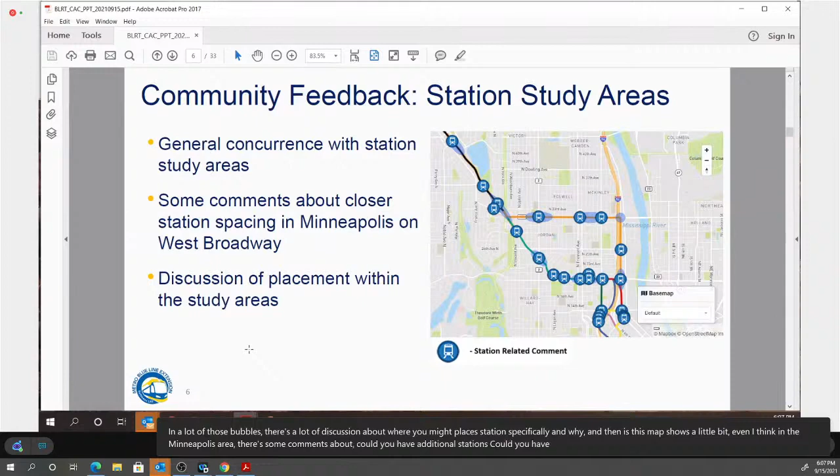So in terms of what we heard about the station study areas, in Brooklyn Park those stations have all been set, so we're focusing more on our southern end for feedback received. I'd say we got fairly general concurrence on where our station study areas should be. In a lot of those bubbles, there's a lot of discussion about where you might place a station specifically and why. And as this map shows, in the Minneapolis area we did get some comments about whether we could have additional stations or closer station spacing, and how that might work. That's kind of an overview of what we heard.

In terms of the visualizations, for the Brooklyn Park community, we re-brought out things people had seen maybe back in 2018. That spurred questions like, how did we make these decisions? How are park and rides sited? Why do you have one at Oak Grove or not at 93rd, and so on.

In Crystal, there are still a lot of questions about the roadway design. We have a bit of an update on Bass Lake Road today. And safe pedestrian connections to the station, and how that all works, has been a continuous topic—one we heard in the past and still hear today. That's a good indication for us that, like with the Bass Lake Road station, pedestrian access, the safety of the pedestrian environment, and how it feels are all important things.

In Robbinsdale, also pedestrian safety. Jason's been at a few meetings where that's been something we talk about quite a bit. Traffic flow, how does it work with emergency vehicles, does it flow with traffic, will it make traffic worse. A lot of conversation about that, because in a lot of ways LRT just flows into that community cohesion conversation. How does LRT become part of what is there versus a dividing piece? And then obviously the connection to Robbinsdale and North Memorial, and that park and ride discussion.

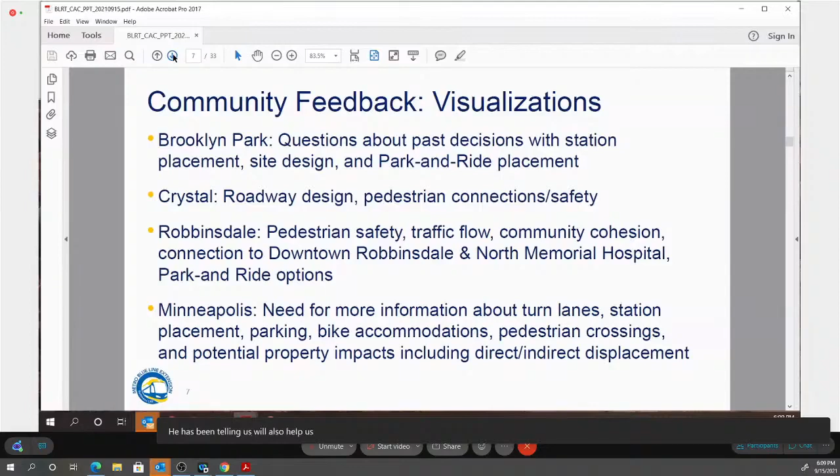So we will continue to summarize our feedback, and we'll have a more complete report in October. The basis of what everybody has been telling us will also help inform our draft report later this year. So with that, just wanted to get everybody that update, and Nick has some updates on the technical side.

All right, well good evening everybody, and thanks for coming. I'm going to discuss more of the County Road 81 update, focusing more on the Robbinsdale and Crystal area. As we remember, Brooklyn Park, our plans are already at that 90% level, so not a lot of new information up there, but we continue to work with the staff there to keep engaged. After I'm done, Dan is going to jump in with more detailed information about our status and where we're at with the Minneapolis route options.

So starting off in Robbinsdale, I want to put the caveat out here that all the information you see, we've got some pretty cool videos we put together, graphics based on some plan drawings, and they look very developed, but they're more for just an idea of how things will fit, massing and size of guideways, and how it works. These are really based on maybe 5% engineering, so there's still a lot of stuff that needs to go into this, a lot of work, and that will be our effort next year. But this is really to keep that conversation going, to answer questions about how things work, how they fit, and what are some of the options out there.

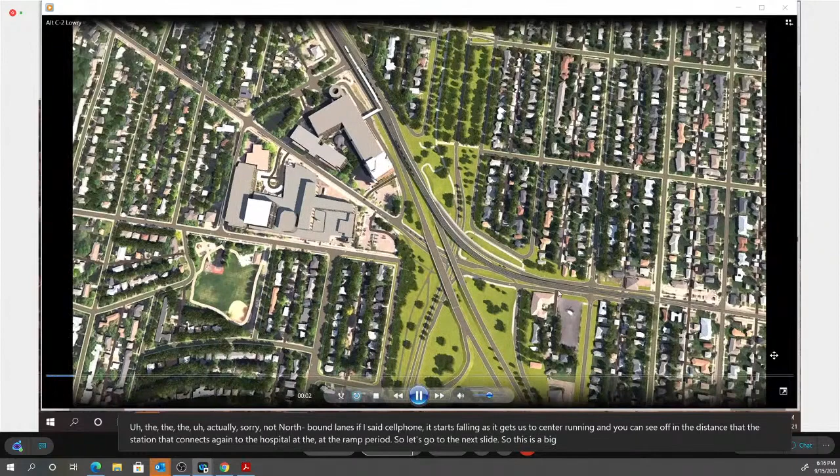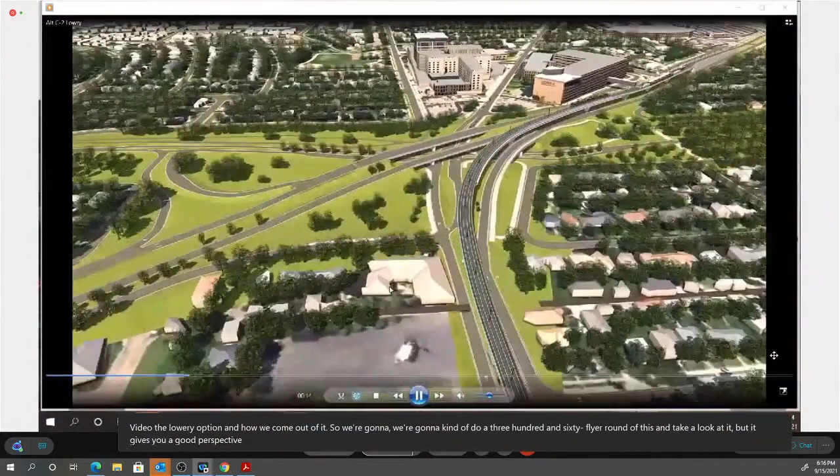So this is a video, actually a video of the Lowry option and how we come out of it. We're going to do a 360 fly-around of this and take a look at it, giving you a good perspective of how the massing of a structure would be, how it fits within the context of the road and the bridge structures being constructed now.

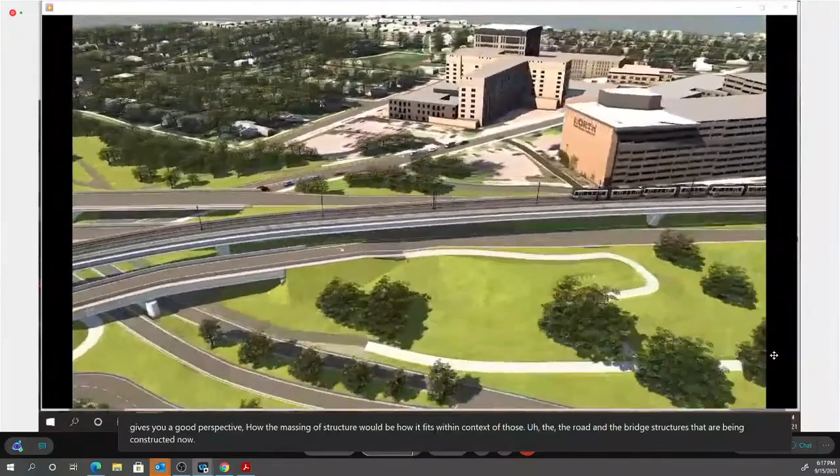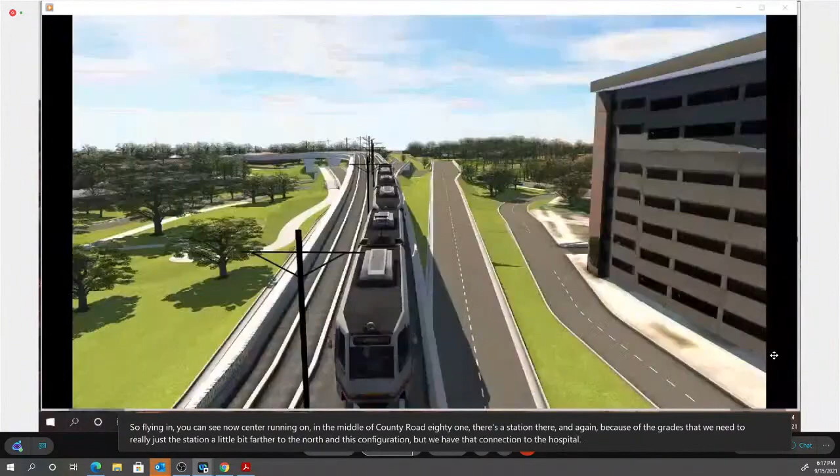So flying in, you can see we're now center running in the middle of County Road 81. There's a station there, and because of the grades we need, it pushes the station a little bit farther to the north in this configuration, but we have that connection to the hospital, to their parking ramp. That's looking at the southbound lane, we're over the top of it, back over Lowry here, and that gives you a better perspective, more of a ground view of how that bridge is taller than the existing bridges out there.

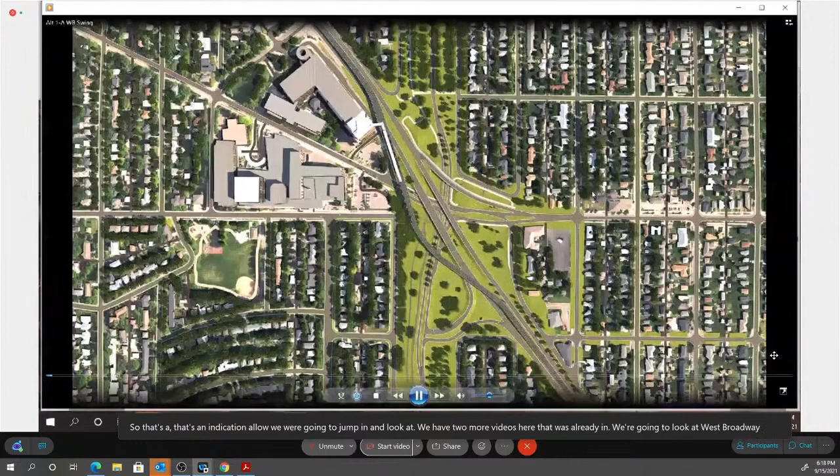That's an indication of Lowry. We're going to jump in and look at two more videos here. We're going to look at West Broadway. We have two options on West Broadway now. This is the one that flies over that southbound lane and makes the jog over a little bit closer to the hospital, with the station more on the south side of the hospital campus.

We don't have a good graphic of it here, but this offers an opportunity at Oakdale to drop down with a vertical circulation structure that would have elevators and stairs coming down to that Oakdale area, giving connections to both that portion of the hospital over there, to the park, and to the neighborhood around it.

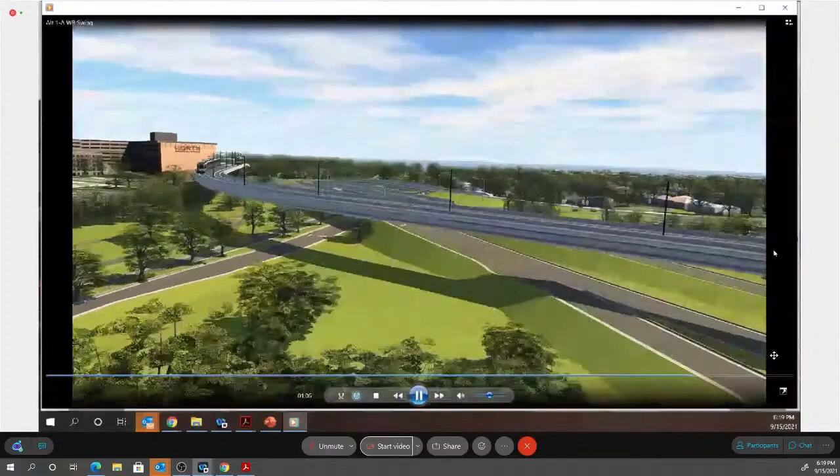So again, there's a lot of detail that will still need to be filled into these, but these are really good to visualize a little bit better, at perspective, how things will work.

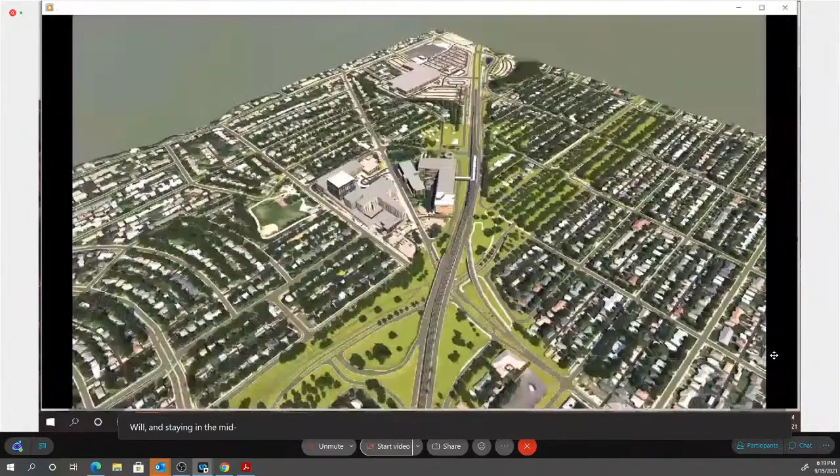So the next video will be the center running option that we looked at first. We're coming up the middle and staying in the middle through this area, and you'll see how that bridge structure will have to get up higher than the road around it, so we can clear those bridge decks.

Because we're coming up, we need to come back down. We're chasing grade because County Road 81, as it goes north, starts diving down also. So it takes a while to get to an area where we can flatten things out to put the station. That's why this option pushes the station more towards the north end of the hospital campus.

And would serve more of that Abbott area for the community to get to. So as we finish up here and take a look at it, if there's any questions or comments on these videos, we'd be happy to answer anything.

Hi, Nick, this is Kathy Fraser. Could you clarify, did you say that the second option will serve more people? I think they would all serve the same amount, it just might be how convenient it is for certain areas.

So the option where we're more on the south end of the hospital probably has the better connections to the trails, to the parkboard trails and to that neighborhood to the south, right on that border of Robbinsdale and Minneapolis.

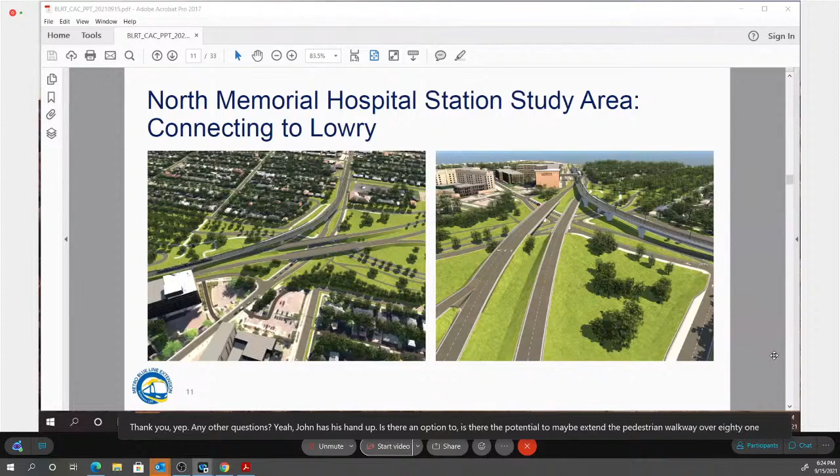Okay, is there an option two? Is there the potential to maybe extend a pedestrian walkway over 81 as part of that trail connection piece to make it more accessible to people on that side of the road?

Yeah, I guess we haven't dove into it that hard. We're at the very beginning of that, but that would be something we could look at.

The grades may work for that, but it might also be pretty tall as it touches down. A lot of times as you have structures and bridges coming up to pedestrian ramps, you need approaches to those. We try to fold them and tuck them in, but if you stretch them out, they're 300 to 400 feet long, so they start taking up a lot of real estate. But yeah, we could take a look at that.

I also want to pull for some initial reactions too. Jason, you brought up that this is close to people, that visual impact, and even between the options, how you start to view them. I think we have other Robbinsdale folks on the call, and folks that maybe live on the Minneapolis side as well, close by.

Go ahead, Brett. Yep, I'll jump in. Actually, this is just from the news reports of how they're talking about Robbinsdale now - some members of the community aren't feeling that good about what's been the development of the conversation right now. I'm not that far away, being just off the Parkway, and I'm trying to visualize it as well, like many of us.

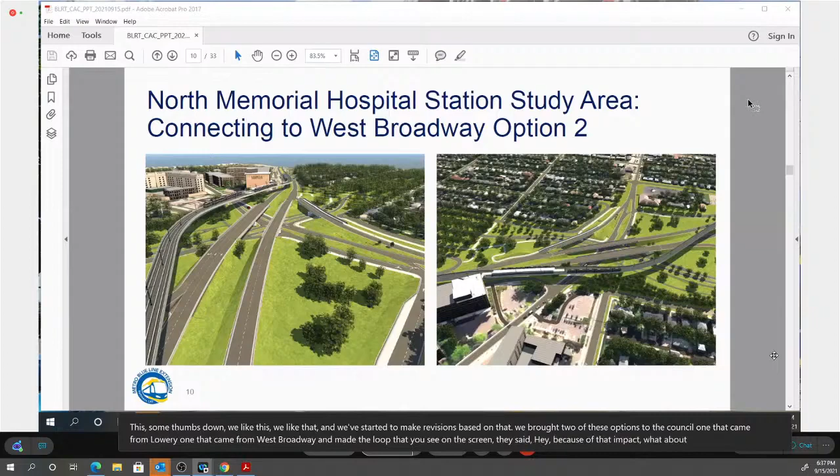They said, because of that impact, what about if you go back and do a video for one that comes up the center instead? So we went back and did that. That's kind of the process we're in - we develop some stuff, get feedback, go back, bring more things forward. That works, that doesn't work.

We talked about stations at 41st and 40th. The council's having us look at - which you're not seeing tonight because it's not quite ready - pedestrian crossings over or under Highway 81 in the downtown area that wouldn't cross at grade on the tracks. We're looking at where that could be, what it might look like, how it might work. All of those are continued iterative pieces that lead us to what municipal consent is all about - continuing to work on a plan that, by the time we get to municipal consent, has addressed the issues that have come up.

Now, if there's a general 'we don't want LRT in Robbinsdale at all,' that's a hard one to solve by design - that's a different analysis. What we're trying to do, and I think Jason's right, there's a lot of concerns about a lot of things, and we just pick those off as we go and start addressing them and coming up with answers.

Can I follow up with a question to Dan? Catherine, sure. I'm getting more detailed questions from folks, and I'll just read them off and you can tell me where I'll find the answers. Who is building this train? What materials are being used? What percent of local residents are being either trained or employed for working on the light rail?

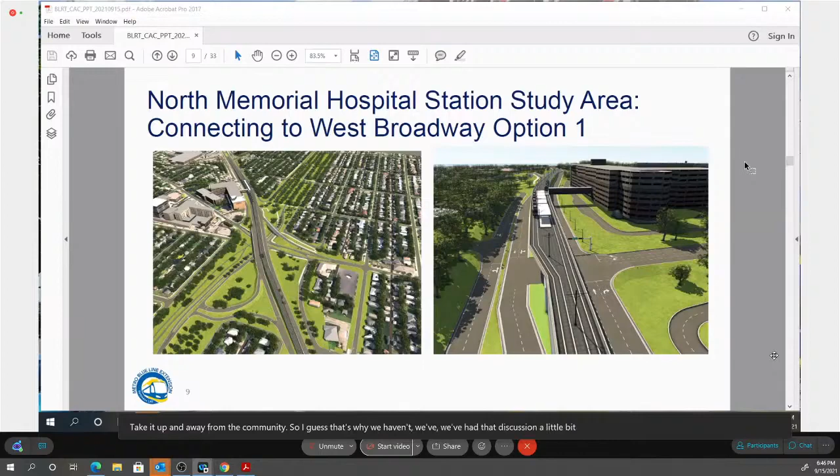We have shown some of those options, and I think we don't want to elevate through a whole area because it really changes the context of how things go. Taking cost out of it, it's definitely way more expensive, but in areas with grade issues it makes sense. This is a long structure because we have to come up and over bridges and then catch up with grade, so it lengthens it out. But in areas where we have space to get it in, it really makes it part of the community instead of taking it up and away from the community. That's why we've had this discussion and talked with some folks. We have some examples, and I don't think grade separating through the whole downtown area has been well received.

So shall we keep moving here? We've got a few more slides, and Dan wants to talk a little bit about Minneapolis too and what we're doing there.

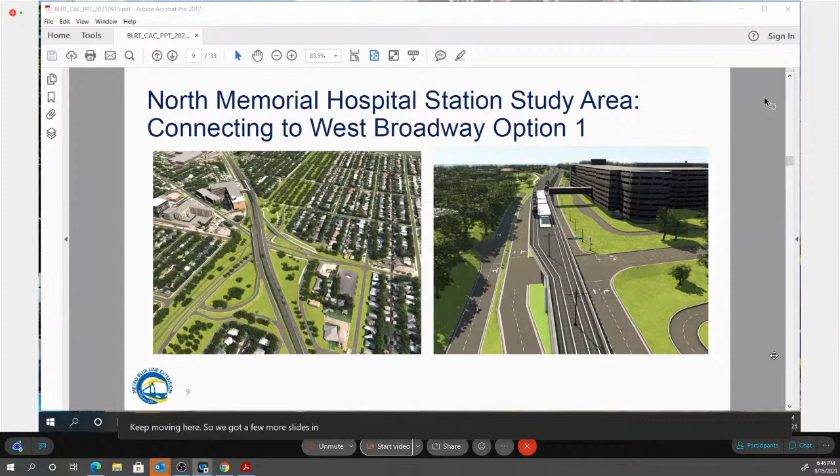Moving up the road here, getting into Crystal, we've mentioned before that we're taking a look at, as we get north of Highway 100 on County Road 81, continuing north when we start veering off up at about 73rd north of 694, it's 6 lanes of traffic now. If we bring in center running LRT, that would take up two of those lanes, one in each direction, however you want to allocate it. Then we'd be able to maintain 2 lanes of traffic each direction outside of the light rail running at grade in the center.

We've looked at the capacity of that highway section, making sure we can get vehicles through and maintain capacity by going from 6 lanes down to 4 lanes of vehicle traffic. We've also looked at what this does to intersections, because that's really where capacity issues show up, how the intersection is operating, making sure our work there doesn't severely hurt intersection operations, that things still flow well and are convenient.

What we recognized though was that Bass Lake Road, being such a major intersection going through there, with this configuration was a challenge for us to keep that intersection working at capacity.

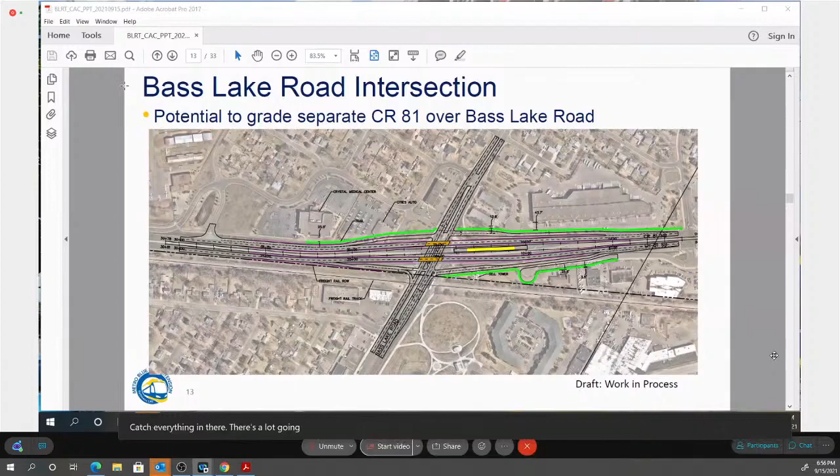And Crystal, some of the other stuff going on is obviously there's an airport there, and previously with the project we got a permit for doing our work within the rail corridor. Now we're moving about 95 feet closer by moving the alignment into the middle of County Road 81, so it's closer to that airport. We're partnering and working with MAC, the Metropolitan Airports Commission, who is the owner-operator of the airports, and with the Federal Aviation Administration, taking a look at this to make sure it's viable.

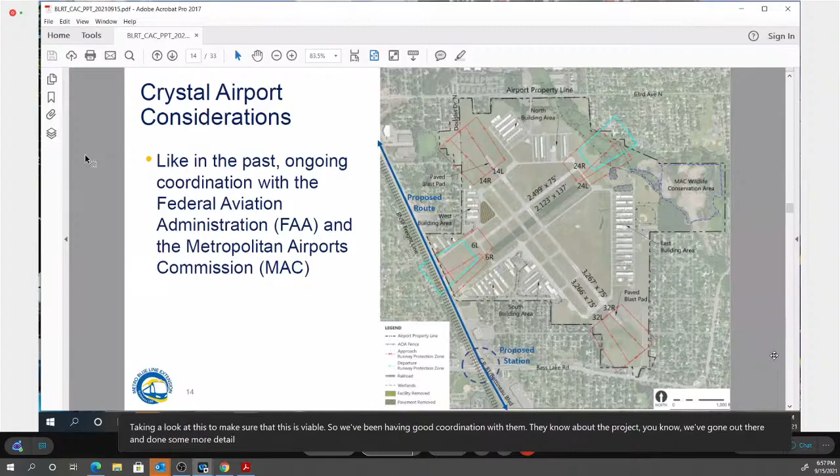So we've been having good coordination with them. They know about the project. We've gone out and done some more detailed surveys in this area. We could probably take a look at the next slide, Sophia - some more detailed surveys of where the glide zones and approach zones for the airport are, and how our facility would fit within there. So everybody's comfortable that we could go through here and it'll operate and not interfere with the airport operations or be a safety issue.

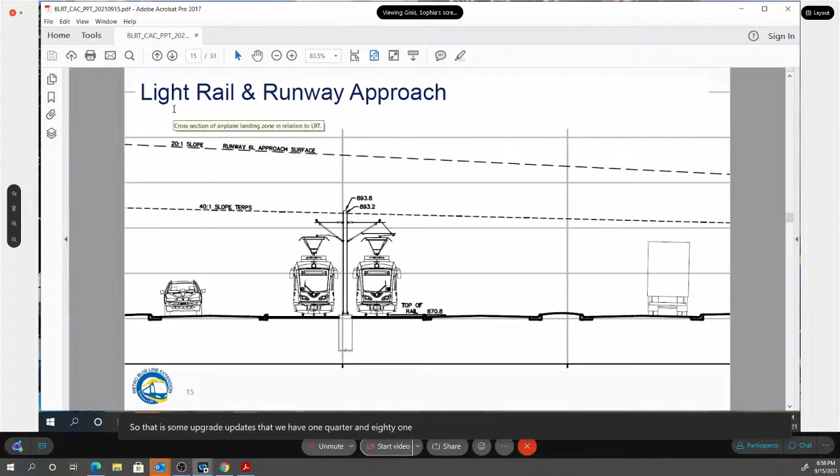So that's some updates we have along County Road 81. I think we have one more slide, Sophia - upcoming meetings we have in Crystal here on Wednesday, September 29th at the Community Center. We'll have a lot of the same information and be looking for input from the public on some of the information we have out here. We'll have upgraded some visuals of that interchange that'll be a little more refined and give people a better idea how it all fits in context.

And then in Robbinsdale, I think Sophia already talked about this a little bit earlier, we're looking to have an open house here in the October timeframe and continue our conversations there.

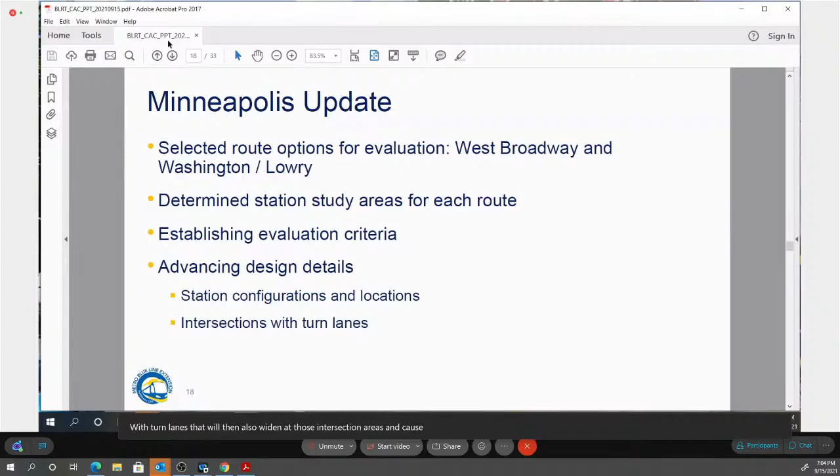Those details come down to where are the actual stations going to go, what options are there for station placement and configurations, and what impact will those decisions have on adjacent right-of-way impacts and right-of-way needs. And where are there intersections with turn lanes that will then also widen at those intersection areas and cause property impacts? They're critical because while we've shown that we can fit LRT in those corridors, we know certain things will require more significant impacts—and those are stations and turn lanes.

Considerations of equity: which of the routes will more equitably serve the community? Where has there been redlining in the past on property ownership and property use that could be addressed by providing a more equitable transportation solution? Where are there income impacts and past historic disincentives that can be addressed by building equity into the project?

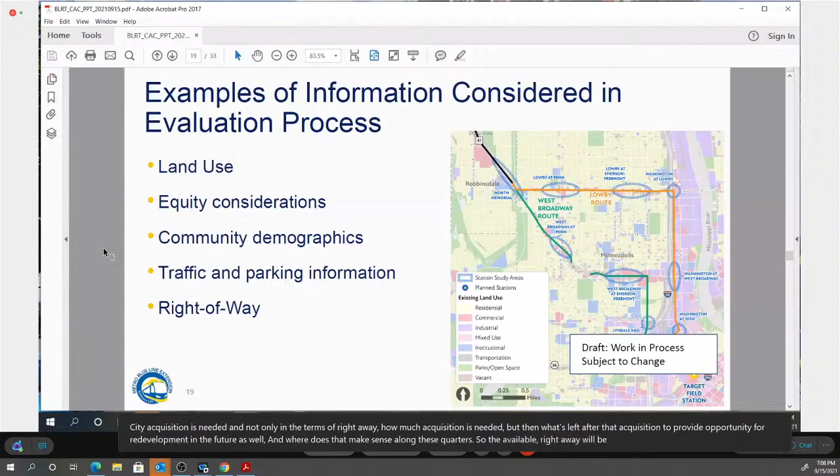Some of these are real quantitative things, like ridership—this serves this many riders, this serves this many riders. Some are more qualitative and judgment-based—this has more opportunity for development than this route, this one has a better community feel than that route, those kinds of things.

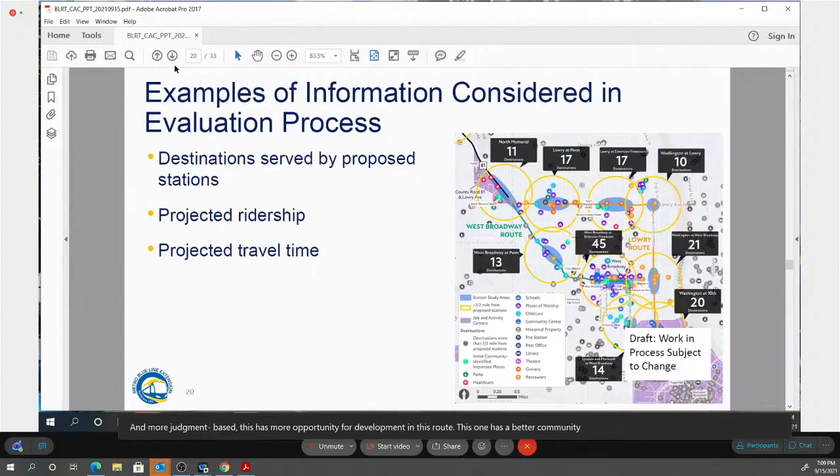So we'll be pulling together both the criteria and the measurements and the evaluation process. That'll be part of our report and our draft report as we recommend and put data together, but it'll also be part of our workshops, where we'll bring this information together for the community to review, input, and analyze. So that's the evaluation side.

The other side becomes, how do we make available drawings, and when will we make available drawings with details that show things like turn lanes, various station placements and configurations, dimensioning, and routing options of LRT and street configurations—including whether we start to build some one-way pairs in for streets, or one-way pairs in for LRT.

Where are our tightest areas? All toward what's the best way to address both the needs of the LRT project as well as the impacts to adjacent properties and property along here and right-of-way acquisition.

We're working on those detailed drawings right now, and we hope to bring those forward as we have numerous community design workshops in Minneapolis to look and engage on what people think works best, what doesn't work, opportunities, challenges for those various options—looking at both data and the benefits and impacts of these two routes, all with the goal not of saying 'that's what we want to build right there,' but with the goal of looking at how West Broadway versus Lowry and Washington compare against each other.

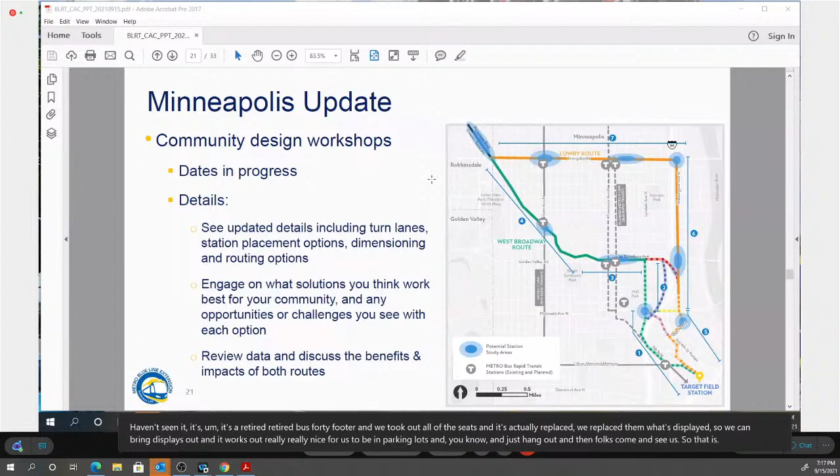Maybe, Sophia, let's move to the project schedule, because I think it takes us... Oh sorry, can I ask one quick question, Sam?

Yeah, sorry. So, Dan, thank you for that update, it covers a lot of the criteria you're looking at. I think for our group, the CAC, it would be helpful to see some of that laid out in a way that shows pros and cons, or the trade-offs, like hey, we can get to more people but we give up this, or vice versa. Not just criteria like how many people, how many homes displaced, those things are important, but it would be nice to see the comparison of Lowry versus West Broadway with that analysis, and visuals. You have to put visuals with it. Most people walking by this aren't going to understand that plan view, that plot plan view of a station. You need multimedia so the layperson can walk in and make their decision off of that, not just plans.

All good points, yes, great. Sam, I think that's something we'll likely be building in as we continue our process with both the CAC and the public this fall. Absolutely, I think you guys are hitting on the key opportunities. A little bit of our challenge is making sure it's making sense for folks as we move forward, but that is exactly what we're looking to do.

I just want to double check - Jason and Adam, you both have your hands up. Just want to make sure we've got your questions before we move on here. Adam, okay, hands down. Okay thanks, they can go right back up, don't worry.